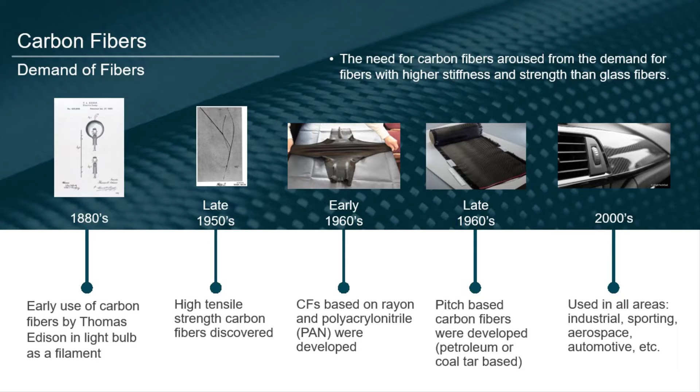So these are the two major challenges that you need to work upon, right? So with these two challenges, how do we go about these carbon fibers? Understanding carbon fibers for multiple different applications is basically what we are going to study. As I said, since the 1960s, the science and technology has been well established. But in the 2000s is when the automotive sector started looking into these fibers quite a lot.

So let's look at carbon fibers. Unlike glass, which has materials like silicon dioxide or sand plus metal oxides that are melted, and then you draw fibers from it, in carbon fibers you actually have to start with a completely different precursor material, right? Or even polymeric fibers: you melt the polymer and then you can draw the fibers. But in the carbon fiber case, you have to start with a completely different material.

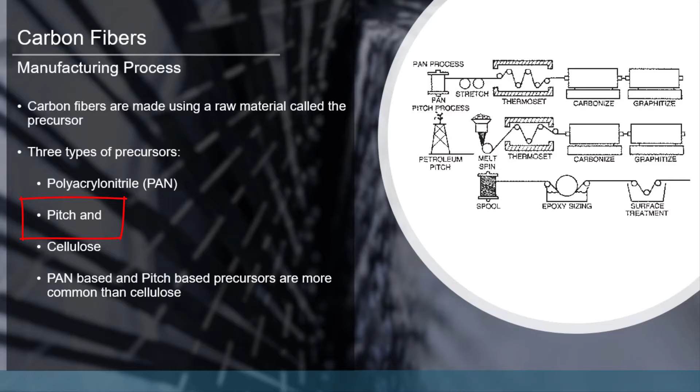The prime reason is carbon is an element which you cannot melt. That is why you use a precursor, draw the fiber, and then you carbonize it. So what are the different precursors used in making carbon fibers? There are three: polyacrylonitrile, or PAN, which is the most popular precursor; the second one is pitch, which is a derivative of the petroleum process; and then cellulose. These days, lignin is another precursor material used in making carbon fibers.

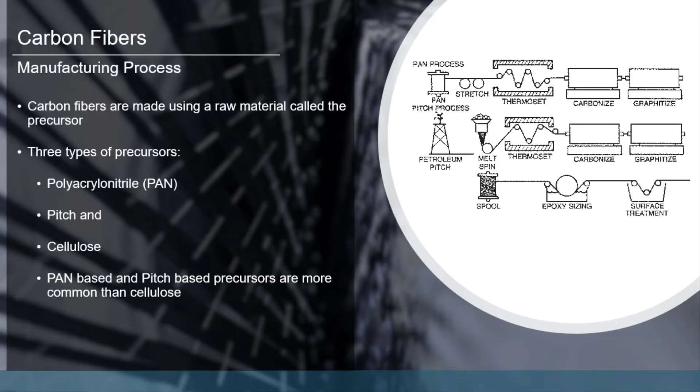So let's look at the PAN or the pitch process. First you take the polyacrylonitrile, which is a polymer, or the pitch, and you make a fiber out of it. Once you have that fiber in a roving form, you pass it through the carbonization and graphitization process to make the eventual carbon fiber. First, it passes through stabilization in air, where it is subjected to high tension. That provides the directionality and orientation of the molecules, which eventually dictate your carbon fiber properties.

This is done at 200 to 400 degrees centigrade, and subsequently it is sent to the carbonization process, anywhere between 400 to 1400 degrees centigrade. So why this temperature range? Because each temperature provides different properties for the carbon fiber, and the cost also changes. Just remember this point, and we'll talk about the cost in a minute. After carbonization, it goes through graphitization, anywhere between 1900 to 3000 degrees centigrade.

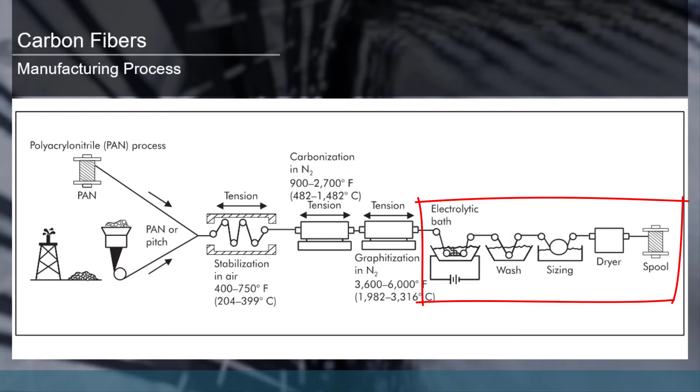After that, you have an electrolytic bath, washing, and sizing. Sizing is giving some kind of chemical functionality, and eventually drying it and transforming it into a spool. Now it's ready for making into a composite. So remember the process: stabilization under continued high tension, carbonization, graphitization, and then post processing. After graphitization, nothing changes structure-wise, but chemically you're making changes to make it adhere to the plastic or polymer you're working with.

So the oxidation process, which is basically the second part, is adding some functional groups so that you can size the material for compatibility with certain polymers.

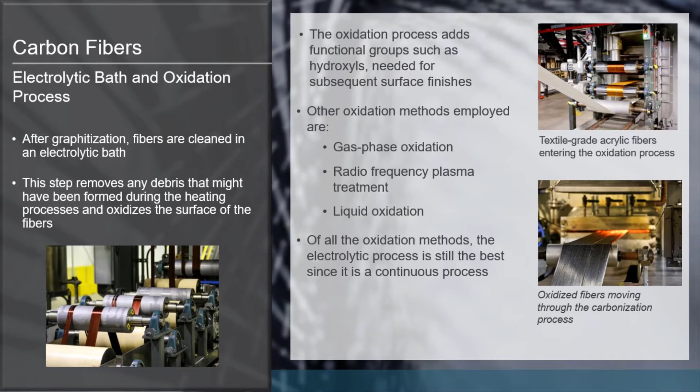Because remember, in the very beginning we talked about the fiber and the polymer. If there is no good compatibility, there will be an interfacial gap. So to achieve good compatibility, you have to size this fiber so the surface of this fiber is compatible with the polymer. And this is basically what's happening in the electrolytic or oxidation process, and eventually in the sizing step as well.

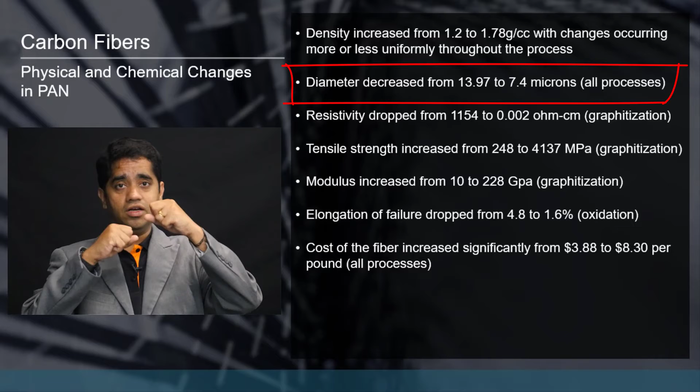Now, let's look at the carbonization as well as the graphitization process. What's happening in the carbonization and graphitization process is that the density is increased from 1.2 to 1.78 grams, with changes occurring more or less uniformly throughout the process. So the diameter is decreased. Why is the diameter decreasing? Primarily because you have this polyacrylonitrile backbone, and then you have all these carbon and hydrogen atoms bonded together, right? Because it's a hydrocarbon material.

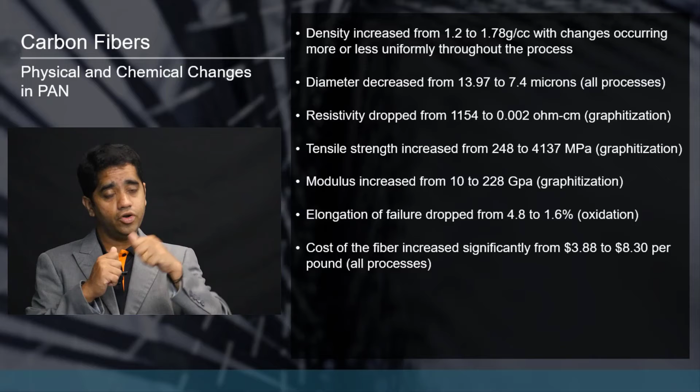Now, when you have a carbon fiber, you want pure 100% carbon in it. So the hydrogen tends to go out. You don't want the carbon to go out and eventually form carbon dioxide. So that's why you retain the carbon by doing this whole thing in an inert atmosphere. But you want to remove the hydrogen. Polyacrylonitrile also has nitrogen, so you want to remove the nitrogen as well as the hydrogen.

So the higher the temperature you subject this to, and the longer you do it for, you will remove more nitrogen atoms and more hydrogen atoms, and that will require more energy, and the cost goes up, and of course the cycle time also goes up, which means that the cost of your fiber significantly increases. But the more pure form of carbon you have, the higher the properties will be.

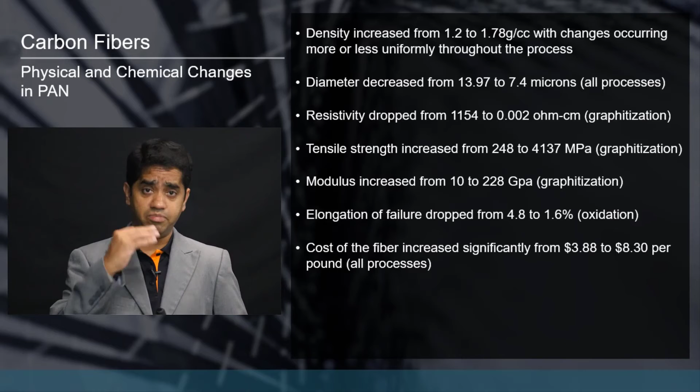So if you remember, we talked about carbon fiber being standard modulus, intermediate modulus, and ultra high modulus. Between these three, it is the amount of carbon content in the final fiber that dictates the different properties as well as the associated cost. For standard modulus, you may get it for $10 to $20 per pound, intermediate modulus may be around $20 to $30, and ultra high modulus significantly higher than that. And each of them will have a specific application requirement in automotive or aerospace.

And you can see these are the properties we are talking about. The tensile modulus between standard, intermediate, and ultra high changes significantly, from 230 to 270 to 400. That is for PAN based, and for pitch based it's anywhere between 300 to 700. And rayon is nothing but the cellulose based, which is again one of the lowest.

These days, a lot of research is being done into lignin, because whether it's PAN, pitch, or cellulose, the cost of the precursor is pretty high. So that particular part you cannot change, right? That's the precursor you're getting. The process is something you can work on in terms of developing a low cost or high cost carbon fiber. But if your starting precursor material is much less expensive, then you can reduce the overall cost of the carbon fiber.

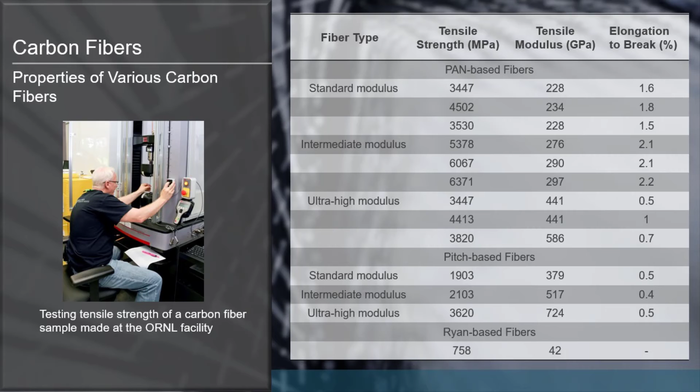So these days a lot of work has been done both by Oak Ridge National Lab as well as many other universities, where they use lignin, which is one of the low cost materials, and if they can achieve the same kind of property portfolio with lignin, then that's a big achievement, because they can reduce the overall cost of the carbon fiber.

So carbon fiber has the potential to see a lot of application in the automotive sector, but the high cost associated with it is what is hindering its widespread application within the automotive field. So they're trying multiple different ways to reduce the overall cost and increase the application base within the automotive domain.

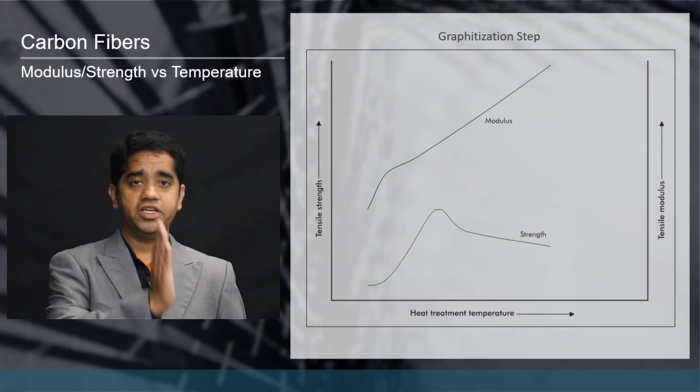And this is a glimpse of the modulus and the strength as the heat treatment process goes from stabilization to carbonization to graphitization. Some significant applications of carbon fiber are in automotive, aerospace, spacecraft, racing cars, as well as compressed tanks.

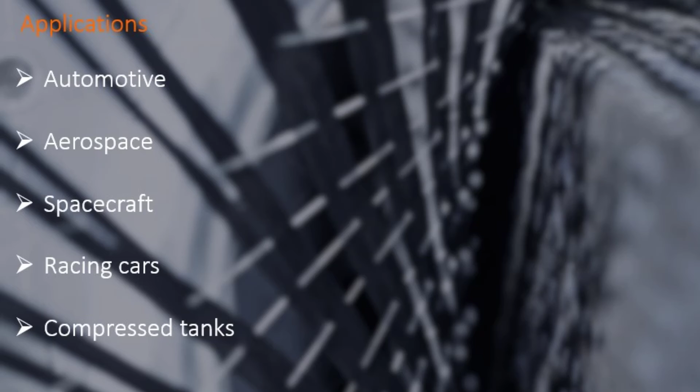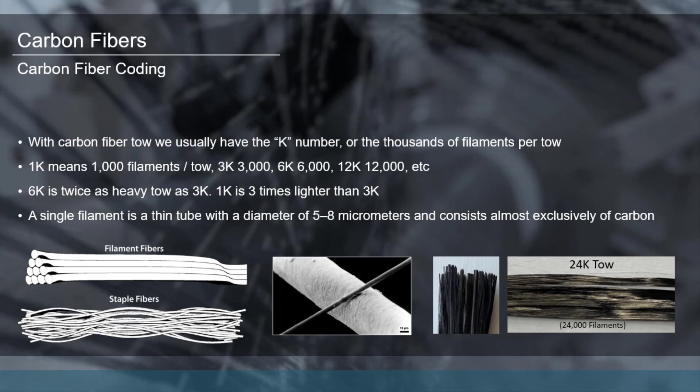Let's look at carbon fiber coding. Very similar to the glass fiber coding, carbon fibers do have a special coding structure. And if you go and ask a supplier, can I get carbon fiber? The very first question he will ask is what tow size. Tow, as we talked about, refers to the number of carbon fiber filaments. You have one filament of carbon fiber, but tows are available in 1K, 2K, 3K. K refers to 1000, so it will be 1000 filaments together, 2000 filaments together, 3000, like that.

So needless to say, which diameter is larger, 1K or 3K? Obviously 3K, right? And of course if you have a 12K tow, the diameter will be very large compared to a 3K. So depending upon whether your application mandates a very thin fiber or a very thick fiber, that's exactly how you need to define the type of carbon fiber you procure.